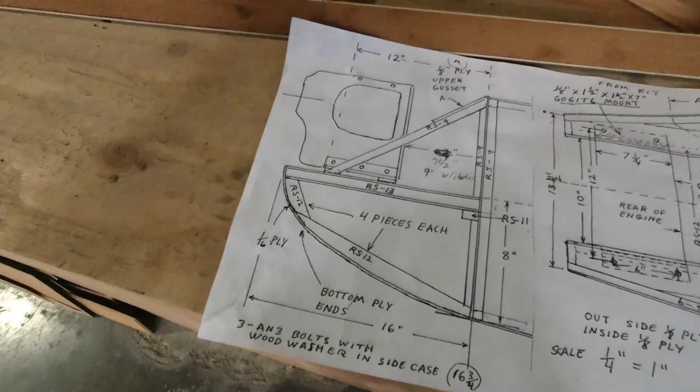Alright, so I decided to start by preparing these diagonals in the front here, and they basically go 12 inches. You can see I got a line here, it's 12 inches from here is the distance.

And once you get these in place, my angle worked out to 47 degrees, ended up perfect.

Once you get it up there, you actually have to bevel the edge a little bit. I don't know if you can see that bevel on there. You can probably see it easier from here, maybe. I know you can see it from there. So it bevels both ways a little bit on the bottom.

This one bevels a tiny bit that way, so you're dealing with some kind of compound angle here - not only is it going at this degree, it's also sweeping backwards. So you had to relieve a little bit of material on this side, and up here you have to relieve some material on the inside. Mine worked out to about 1/8 of an inch there, about 1/16 of an inch here.

And then you just put it on the belt sander. Let me show you, since I didn't show it to you, when I had a line on there - you can actually still see my line there. All I did was set it flat on here, and then I tilted it up like that, just so I could get that angle in there.

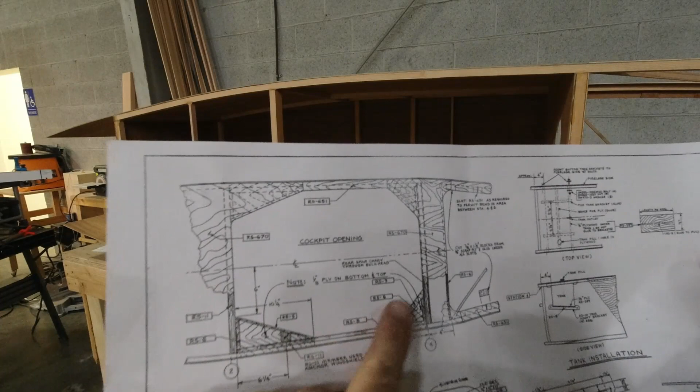We are now working off of drawing number 4, and we're doing this cockpit area right here. One of the first things it gets is an RS8 doubler on each side, going front to back. So I'll get those doublers in place.

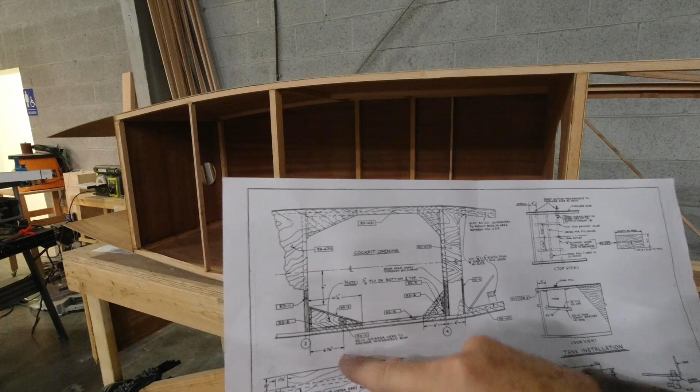After the doublers, we have some RS6 in the front here, some RS5 on the side, and some RS11 tucked in there, which is actually the anchor for the windshield bow. We'll get those in, then get some measurements for the section in the back, which looks like RS9. There's a piece here and a piece here, and then that whole area basically gets capped with plywood.

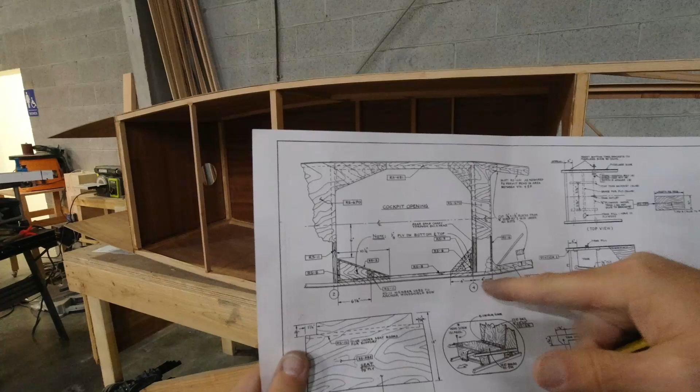So we will start with these RS8s, and then we'll start getting some measurements for the rest of this.

Actually, I've got some epoxy I need to get out of there. All right, that's 27 3/8.

So what I've decided I'm going to do for tonight, with the time I have, I'm going to get these RS8 doublers in place, which go right here in the cockpit area. So I'll have to set the plane back upright in order to do that. And this one obviously goes up here, and those will get attached.

When you're adding structure to this spar carry through area, it gets this piece added on, and then it gets these triangular pieces, these pieces right here that outline the cockpit. It's really cool because as you're building and moving forward, you can see how the strength starts to develop as you get more pieces added to the structure. It really starts to develop a tremendous amount of strength, and you can see exactly where it's coming from.

So anyway, I'm going to go ahead and get that epoxied since I have it on its side, and then I'll flip it over to the other side and do the other piece. Then I'll put it back on its bottom, and I'll be able to do these two side rails, and then I'll move to the front and get these two pieces on the front added.

I think that'll be good for tonight. That's about how much time I have to spare. So let me get some epoxy going.